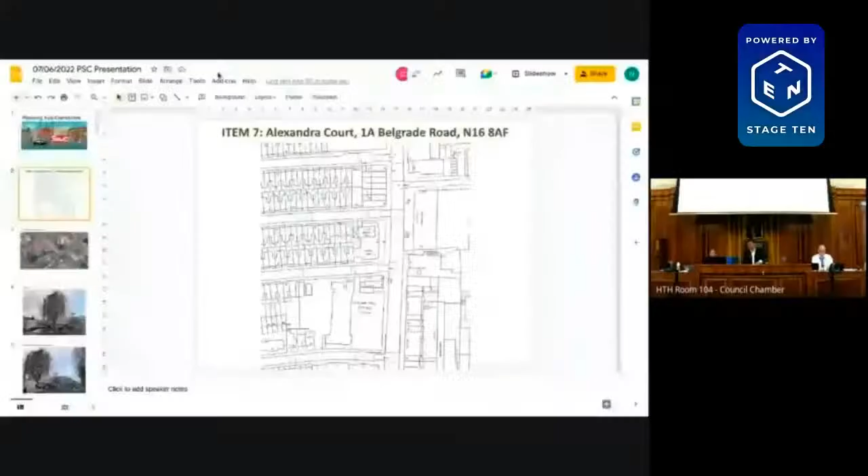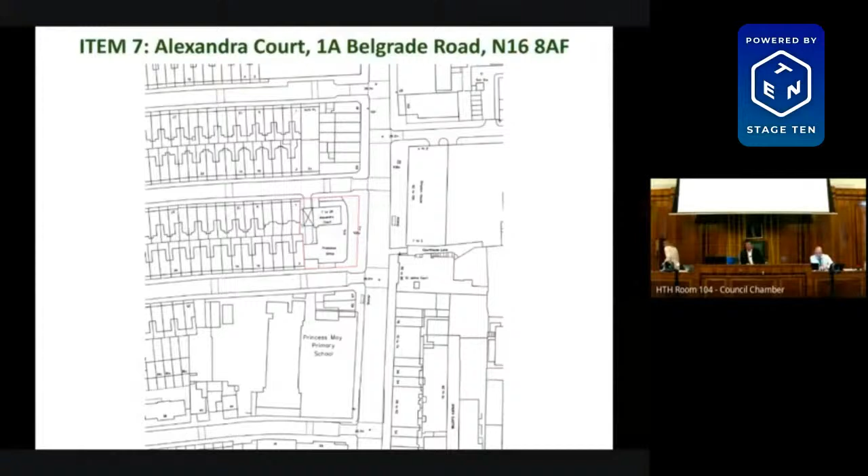In that case, we move on to the first substantive item, item number 7, Alexandra Court. And I believe we're being led by Nick on this one. That's correct. I will put the slideshow on. Can you see the slideshow now? Can you see that? Yes, we can see the slides. Excellent. Yeah, we're just going to dim the lights. One moment, please. Will you tell me when the lights are dim, because I don't have view of the hall now? Yeah, please go ahead, Nick.

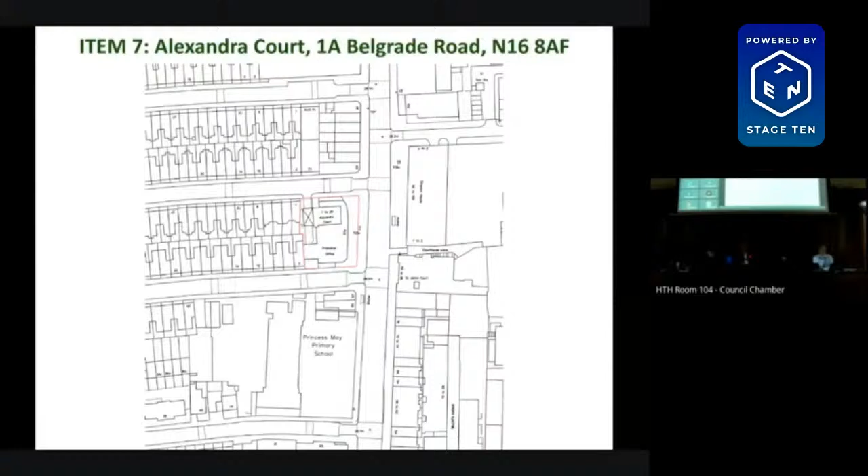Thank you. Application 2021-1807 is for the erection of a part 2, part 3, part 4-storey building facing Princess May Road and a 5-storey building facing Stoke Newington Road, following demolition of lower ground and ground floor office floor space in use Class E, to provide 15 self-contained residential units and a flexible use at ground floor level in Class E. There will also be external alterations to the existing Alexandra Court block to include remodelled front entrances. Before I begin, I'd like to draw attention to the addendum, which includes points in relation to M4(3) units and cycle parking, and corrects some typographical errors.

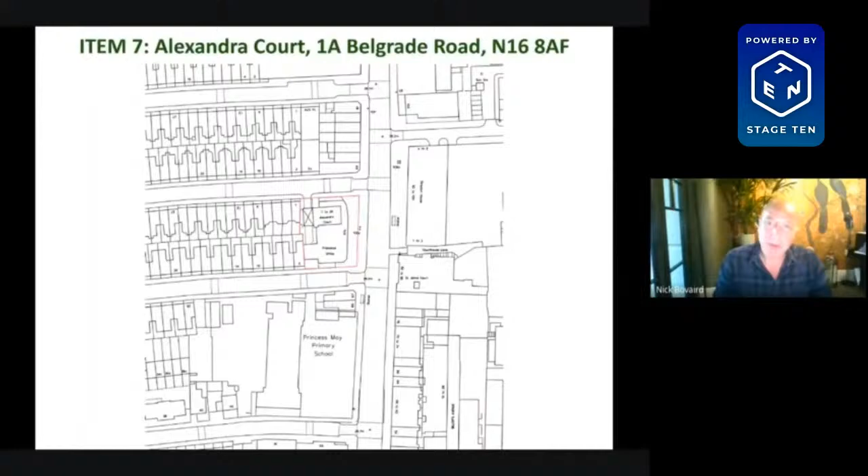Looking north, the application site is located on Stoke Newington Road between Belgrade Road and Princess May Road, and is currently occupied by a post-war 11-storey residential tower block and an L-shaped single-storey perimeter block. A largely unused basement floor covers the whole area of the site. To the east of the site is the boundary with Dalston Conservation Area, and it is located in the proximity of 3 locally listed buildings, which are here, here, and here. The existing building to be demolished had previously provided office floor space. This is the single storey element here.

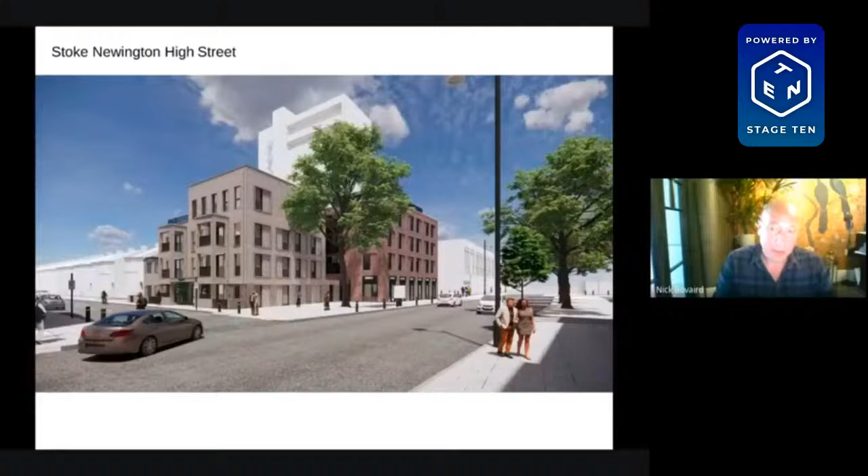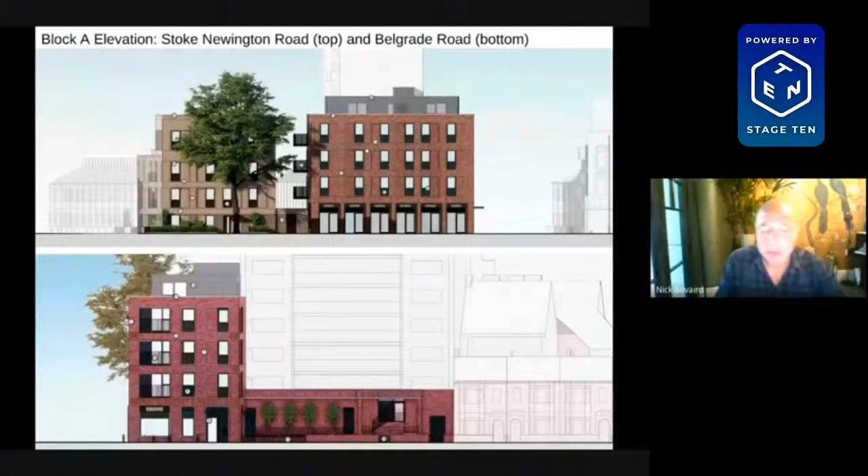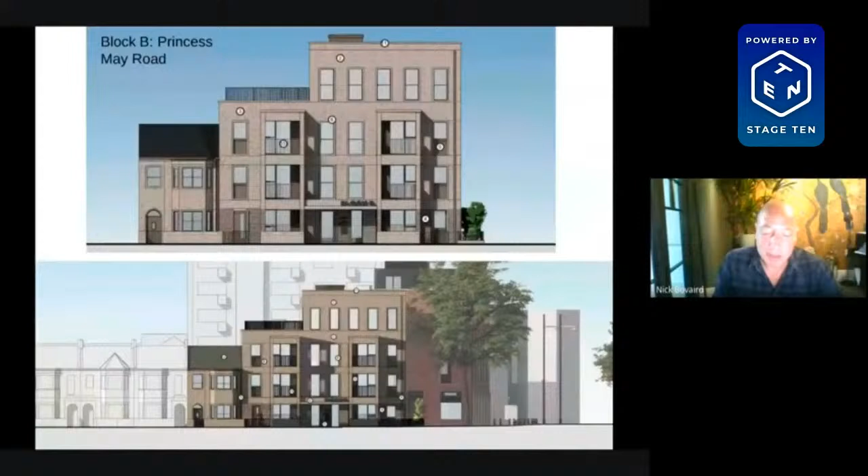Block A has a main 4-story massing in brick, along with a top-story setback floor in powder-coated aluminium. The ground floor level would be in a Class E commercial use with 7 residential units above. Block B steps up from the 2-story massing of the adjacent terrace to a maximum height of 4 stories. It has inset balconies that recall the Victorian terrace and is to be built in a light brick. The materials along with details of the design would be managed by the recommended conditions, and the design of the 2 blocks is considered to be a high-quality response to the sensitive location.

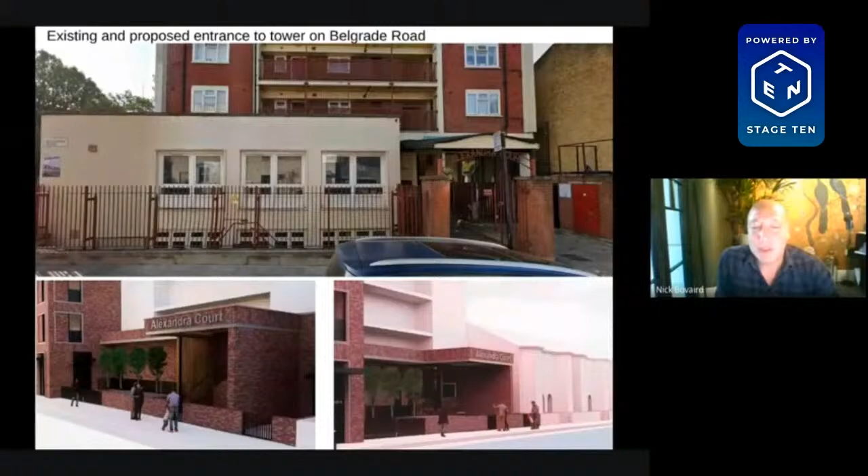In order to ensure that the design of the new development works well with the entrance to the tower, a reworked ground floor facing Belgrade Road is proposed in a matching brick to Block A, and this is considered to be a benefit of the scheme.

The site plan shows the commercial space at ground floor of Block A here. The proposal represents a net loss of former office floor space, but this is considered to be acceptable, given that the rest of the proposal provides 100% affordable housing. The existing floor space has been vacant in this use for a considerable period, and it is now within use class E, so it could be changed to any of the uses of use class E without planning permission.

This plan also shows how the demolition of the perimeter block allows provision of a courtyard between the 2 blocks that allows dual aspect and provides access to the internal cycle store here. This cycle store has a majority of 2-tier parking, but does provide 8 single-tier spaces, including 4 for larger cycles within its overall provision of 42 spaces. The overall number of spaces is 12 above the policy target for a development of this size, and the additional spaces would be made available to existing residents of the tower. The reasoning is understood and the proposed internal cycle parking is considered acceptable.

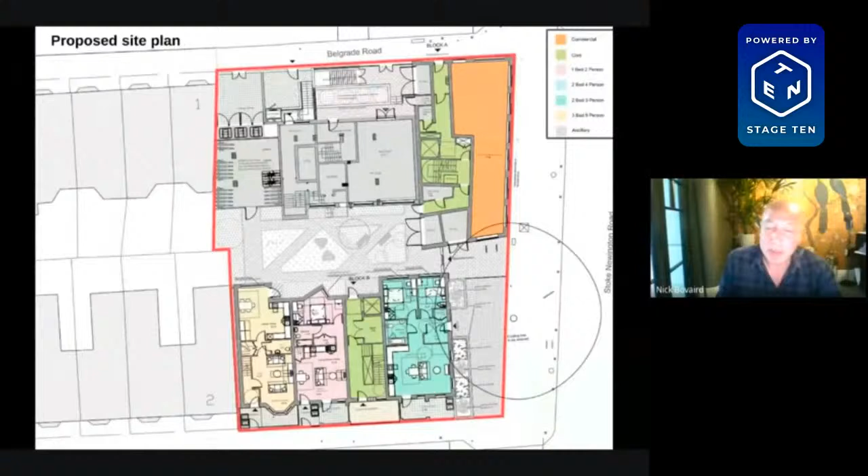A CPZ exclusion to restrict parking permits being issued is recommended for all residential users of the proposed site. 1 blue badge space will be placed on street prior to the occupation of the new buildings.

Overall, the quality of the proposed accommodation across both blocks is considered to be very good. All the units meet the required floor space standards. They're all dual aspect with good access to daylight and sunlight, and they all have access to private amenity space in the form of balconies or a roof terrace.

In terms of sustainability and biodiversity, as detailed in the officer's report, the scheme is also considered to be acceptable, with air source heat pumps, green roofs, swift and bat boxes, along with a carbon offset payment. A number of conditions are recommended to ensure that the scheme is carried out appropriately in these respects.

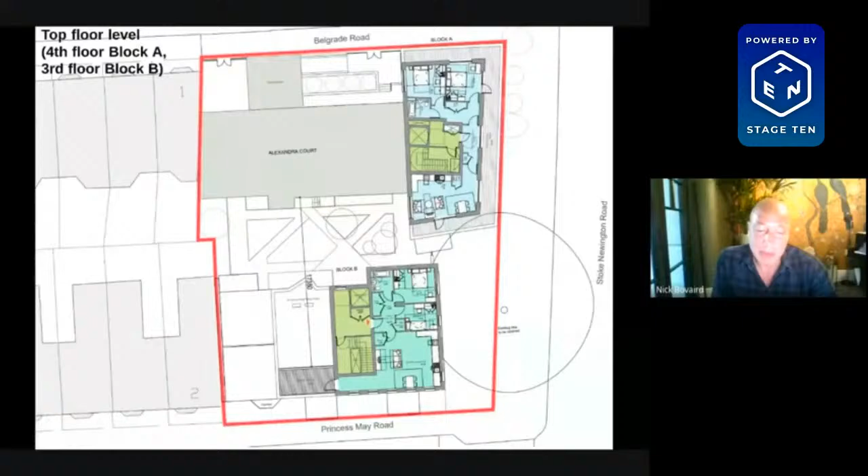The floor plans of Block B show the layout, which contains 8 units. Adjacent to the terrace is a 2-storey house of 3 bedrooms, shown here in yellow. The 3-storey element, shown in pink, contains 3 one-bedroom units accessed from the court. The 4-storey element, shown here in turquoise, contains 4 2-bedroom units.

Overall, the proposed housing mix is considered acceptable. It's strongly supported by the borough's housing team, who note that the proposal is for 100% affordable housing, provided as London affordable rent, which is considered directly equivalent to social rent in both the London Plan and Local Plan 2033.

The applicant is the Islington and Shoreditch Housing Association, who've designed the proposed housing mix to respond to their own recognised housing need. In addition to the 2 proposed 3-bedroom family units, smaller 1- and 2-bed units within this tenure are in demand as a result of the government's bedroom tax policies. And this additional supply of smaller units would give existing Hackney residents the opportunity to downsize, freeing up larger units for families currently living in overcrowded accommodation.

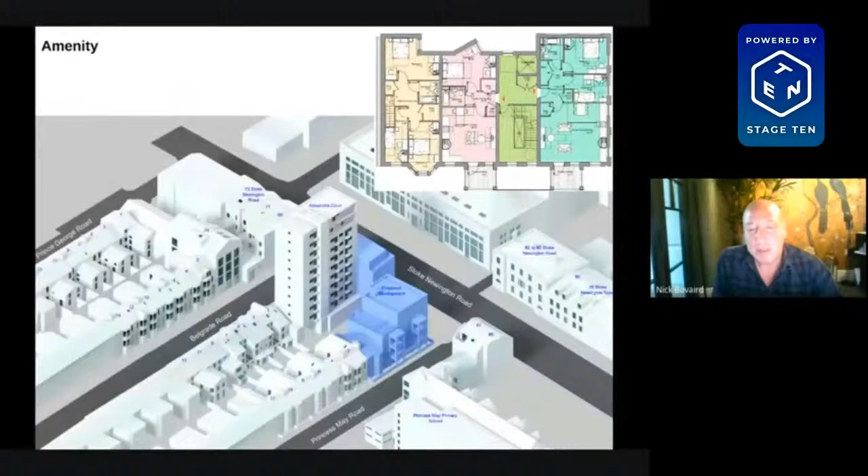As is laid out in the committee report, in amenity terms, the massing of the blocks is sufficiently set away from surrounding windows to ensure there would be no significant impacts on outlook, daylight, sunlight, or sense of enclosure. As is shown at the top right, the rear of Block B is designed so as to prevent overlooking, with the orientation of windows away from the existing windows of the tower.

The uppermost flat in Block B has the use of this roof terrace, which is sufficiently distant from the facing existing residential units of the tower that a privacy screen is considered unnecessary in respect of overlooking. For these reasons, the proposal is considered acceptable in terms of its amenity impact on existing residents.

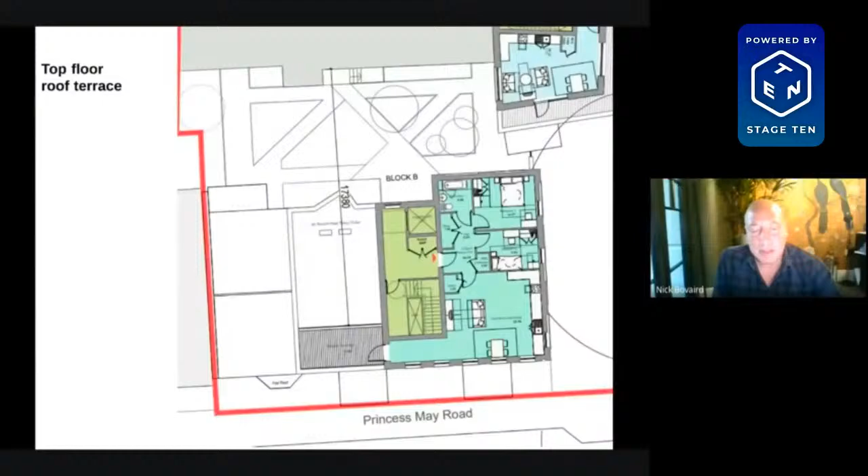It has been agreed with Transport for London and the borough's tree officer that these trees could only be removed if they were to be replaced by suitable replacement trees. In order to ensure that trees can be planted without conflicting with existing subsurface infrastructure, the applicants have dug a trial pit under licence from TfL. This process was successful, and the applicants have now proposed 5 replacement trees parallel to the existing location. The proposed trees are shown here within a tree pit and would be planted under the recommended 278 works.

The CAVAT value of the existing trees is calculated at £22,000, and this is required as a payment in the proposed legal agreement. 6 additional trees are proposed within the borough's own highways works figures of £59,000, and these would be planted on neighbouring streets near to the site. For these reasons, the proposal is considered acceptable in respect of its impact on neighbouring trees.

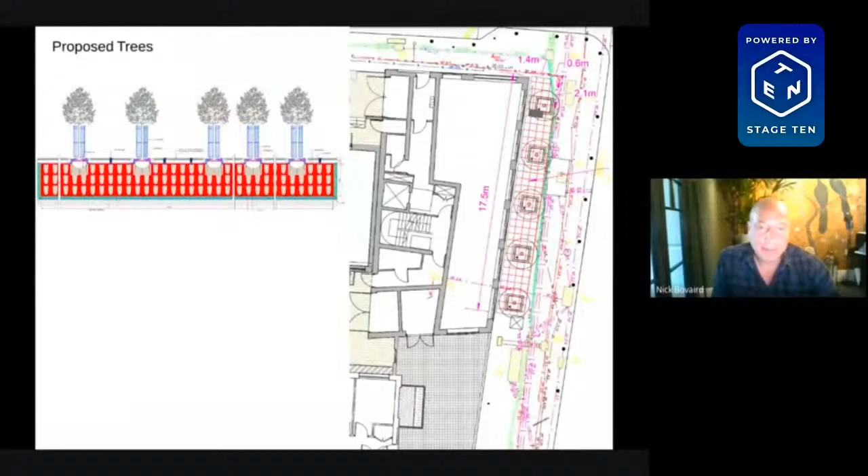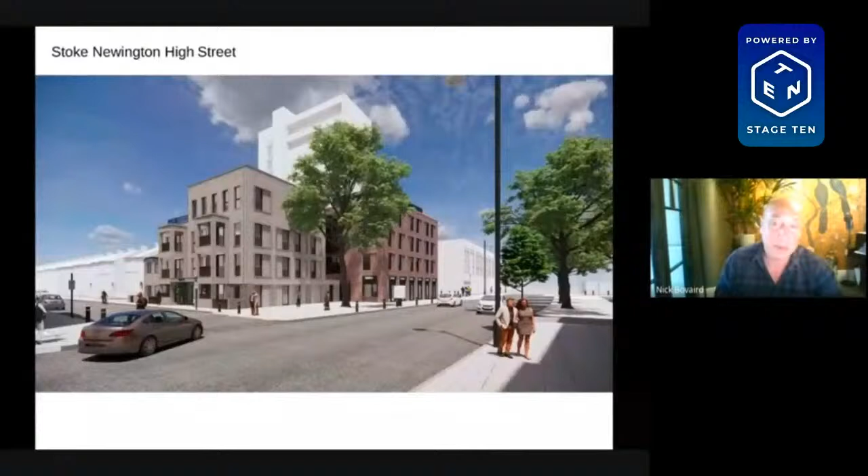And to conclude, the proposed application is considered to be policy compliant. It provides 15 units of affordable housing in a sustainable location and in a genuinely affordable tenure. The proposed design is considered to be of high quality and would rebuild the street frontage following the demolition of the unattractive existing perimeter block. The proposal would provide a good standard of accommodation and would be without significant impact on neighbouring amenity.

In addition to providing affordable housing and a ways into work financial contribution, a payment to entirely offset the carbon emissions of the development is also provided, along with highways works to improve surrounding streets. In these and in other respects, the scheme is considered acceptable and is recommended for approval.

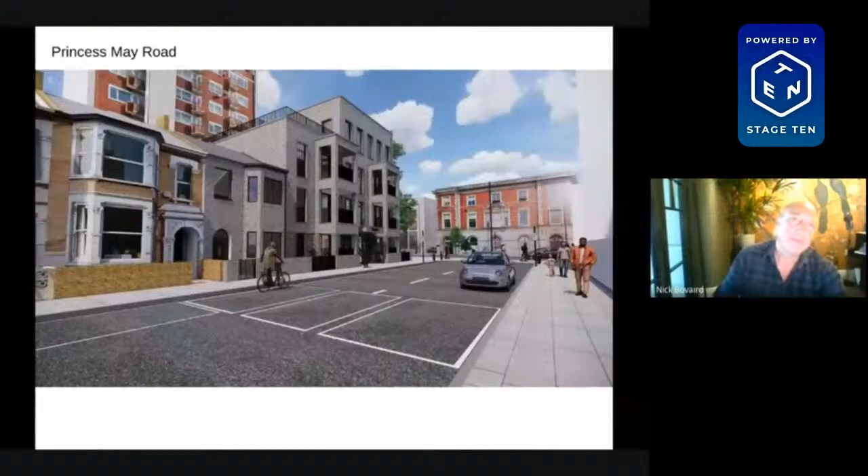Great, thank you very much, Nick. Can we get the lights? Is that right? Thank you.

Right, moving on to speakers in that case. I think we've got one objector, Lorien. Is that right? Nice to see you, Lorien. We're operating the traffic light system, so when it goes amber, you have a minute left, and when it goes red, you'll have 10 seconds left of your 5-minute allocation. Is that okay? That should be fine, thank you. Great, no worries. In your own time. Thank you.

Yes, I'm Lorien Davis. I live at 2 Princess May Road. You'll have seen a few pictures of my house. Number 2 is the only building in the road currently physically attached to the former probation office, which is now temporary accommodation. And this is scheduled for demolition for this project.

With my late husband, I was one of 7 local residents who made it to the September 2020 exhibition of proposals, held, strangely enough, a third of a mile away, despite there being a church hall at the bottom of Princess May Road. We made our concerns about the plans known at the time, and we were promised follow-ups and more information, none of which ever materialised.

Princess May Road is a designated school street. If this goes ahead, there will be huge disruption to available parking and deliveries. Site traffic will cause potential danger to children using the main entrance of Princess May Road School, which is opposite the new development. Or if site traffic enters from Stoke Newington Road, which is a red route and a major bus route, this will be disruptive and potentially dangerous.

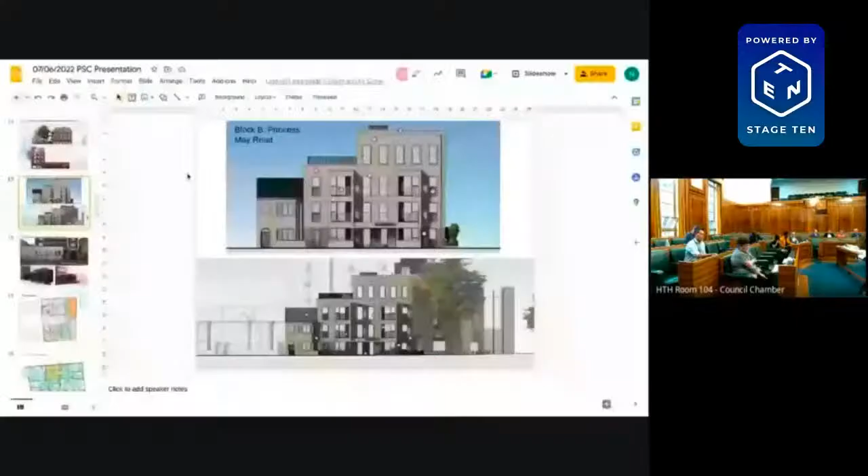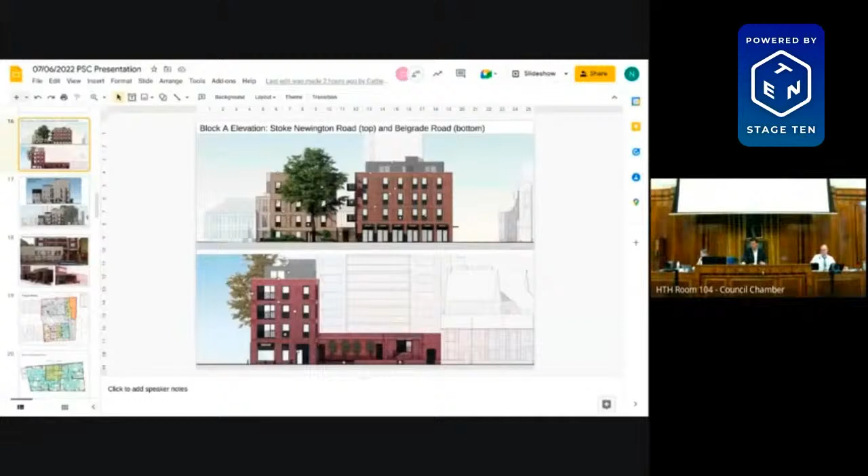So this is how they propose to look on the development. It's 8.1.32. The condition, I thought it was 33. Sorry, Councillor Boswell, can we just finish with Nick and then I'll come back? So the condition is 8.1.33. Can you see this now? Yeah, we can.

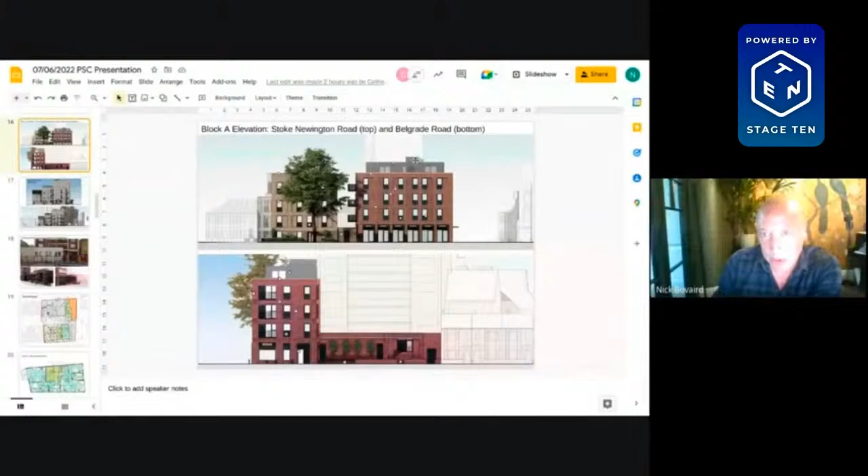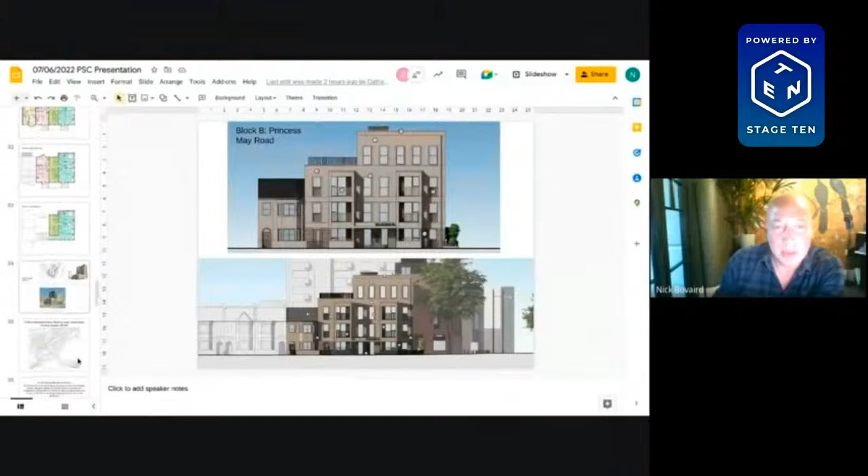Thank you, Nick. So we've got heat pumps on each building, and then do I have a roof plan? Sorry, can you speak up, Nick? Yes, sorry. You can see above the parapet line we've got a plant store there. That's what it looks like. I don't think I've got a roof plan in these drawings, apologies. But essentially there is space for heat pumps on one of the buildings, which would be 8 units, and one of the buildings, which would be 7 units. So you've got quite a lot of space up there, and there's also a green roof on one of the buildings that has the heat pumps.

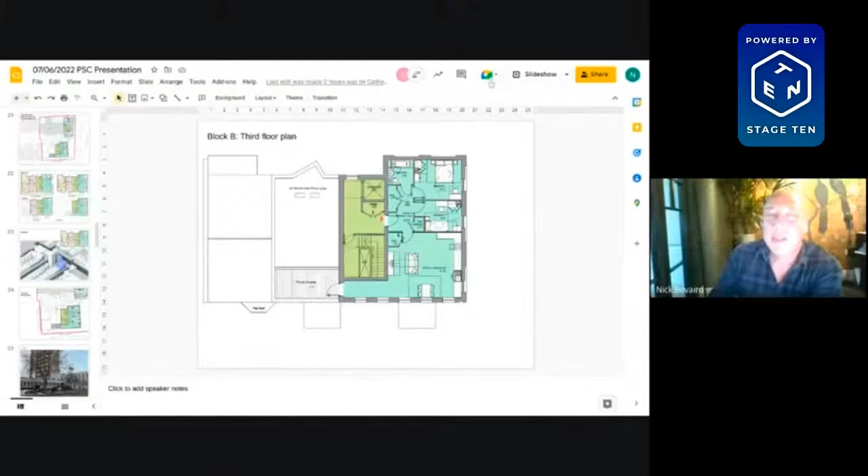Sorry, Nick. So you're saying that the heat pumps are on the roof, not on each of the individual units? Yes, exactly. They need to be external and they're on the roof, because they need to draw heat from the air. So you can't stick them internally or in an internal plant room in a basement. I think members might have been imagining, as I was at the beginning, one stuck onto the side of each of the individual units. Oh, I see what you mean. They may not be communal. They may be connected up to each individual unit. That's correct. Sorry, I didn't understand what you meant.

I've got another scheme at the moment, which is why it's a live issue for me, where another developer is saying that they're actually a lot more efficient in the building they're building if they're individual rather than communal, which is something we're getting to the bottom of. We do have that condition on this one that allows us to have a look at them at the next stage. It may be something we're interested in revisiting. Certainly it's a live issue on one of my other schemes.

It's that I just can't see it working to have 15 individual units of a flat being so far removed from, say, the ground floor flat, first floor flat. They need to be relatively close. I mean, just from my limited knowledge of how heat pumps work, what I'm concerned about is developers and applicants claiming that they're putting a certain system in when actually it's not practically possible. But I'm not an expert.

I will acknowledge that, but just from my limited knowledge, I would query that you could have 15 individual condensers that would work for 15 properties spread throughout the building. But anyway, I'll leave that there. That's all right. Chair. Nick, do you want to just answer that one about what's the expectation, what's the policy around this? Certainly, I don't mind answering it.

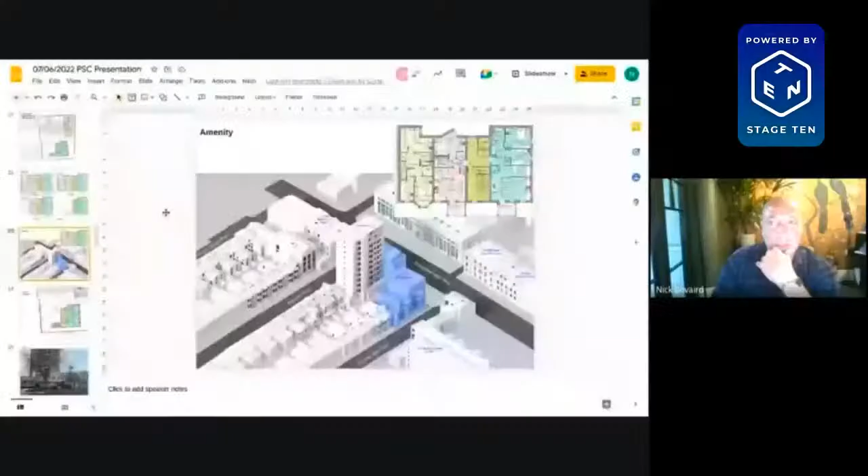So what you see here is Princess May Road and the neighbouring part of the development. Now, it might also be helpful to see the other side of that, but effectively it doesn't go any further back than number 2 Princess May Road. So there's not really any bit of it that could overshadow it. And that's borne out by the daylight sunlight report.

So if you look at the daylight sunlight report in detail, it tells you what the VSC impacts are, for example, for the daylight of each individual window. So it's not the most interesting read, but it does break down all of the detail that you need. So if you ever have a question like this in future, you can always have a look at that in advance.

Now, the biggest impacts are to these windows here. And as I said earlier, those impacts are not so significant as to warrant refusal of the application. But you don't necessarily need me to go into all of that detail in my report, because it's already in a report that's been read by me and summarised for you effectively.

The other part of the question, I think, was the statement that might seem a bit bold on first hearing, that it's always possible to build next to something without damaging that building. And that is a hypothetical situation in which everybody knows what they're doing, in which everybody goes through building control and thinks about the work that they need to do. It is possible to build without damaging, for example, here, number 2 Princess May Road.

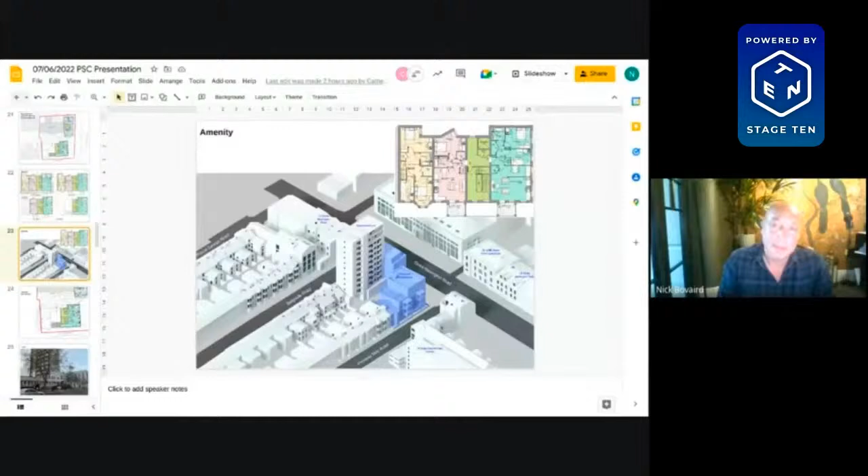Devil is in the detail, and that detail is considered by the building control team at the next stage. And yeah, it will be possible. Then it's up to the applicants to make sure that they make the possible happen. Great, thank you, Nick. John, Councillor Nobles, to answer your questions.

Great, thank you. I'll go to Councillor Levy before Councillor Joseph first. Thank you. Thank you, Chair. Just a quick one. Should the committee approve this application, I wonder whether we can put an informative in that the disabled bay should be sited within 50 meters of the block entrances. Otherwise, it defeats the purpose of having the disabled bay in the first place. Put an informative in.

It's an on-street bay, so we have control over that, and I've committed in the addendum to it being within 50 meters because I realised that was something that I'd left out of the original report, but it's something that we do as standard, but it's also worth saying in our report, so I put it in the addendum to make sure that it's there. Okay, Councillor Levy, great, thank you. Councillor Joseph. Thank you, Chair.

So just a few questions about the designs of the flats themselves. I'm not sure if Nick or the applicant would like to answer, but they're all open plan. And in terms of family living, that can be a bit difficult with things like noise from the kitchen, things like washing machines, heat from cookers and so on. I just wondered why you decided to make them all open plan rather than having a separate kitchen area. That's my first one. Nick, can I bring you in on that one?

I think this is a design choice that's made in many places, and it's really up to the applicants how they set these floor plans out. If you look at the house, for example, it's not open plan. Here it is open plan. It's a design choice, I suppose, based on things like where the windows are, the constraints of the particular rooms. You've got separate rooms for people to disappear into, but it's not something that we would necessarily start making applicants do one or the other. So there's no policy around it particularly that we would ask for.

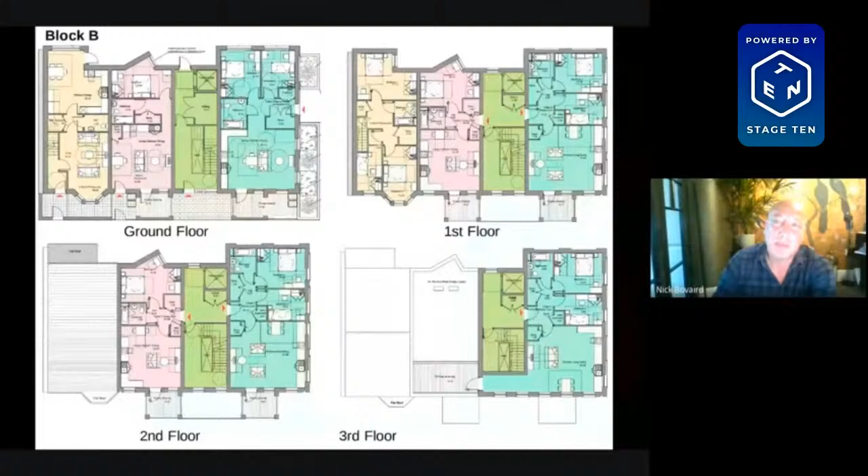There are policies about quality of accommodation, but this isn't really a question of whether something has a good or bad standard of accommodation. It's really a matter of choice for the people who go into the places and also for the designers. And we don't think that there is any reason for us to refuse one or approve another. Okay, thank you. Applicants, anything to add to that? Or no? Okay, thank you.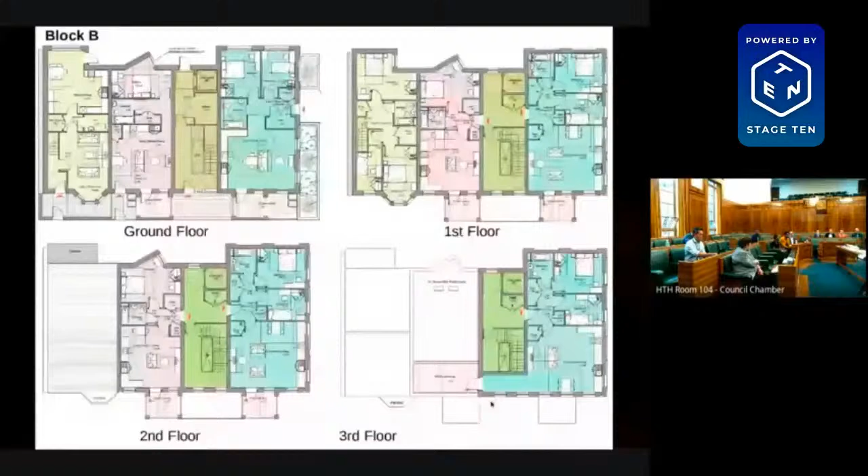On block A, the top floor flat that's inset has access to its own terrace, but the roof of that flat is for maintenance purposes and plant. So it would only be access for maintenance only. Okay, you happy? That's okay.

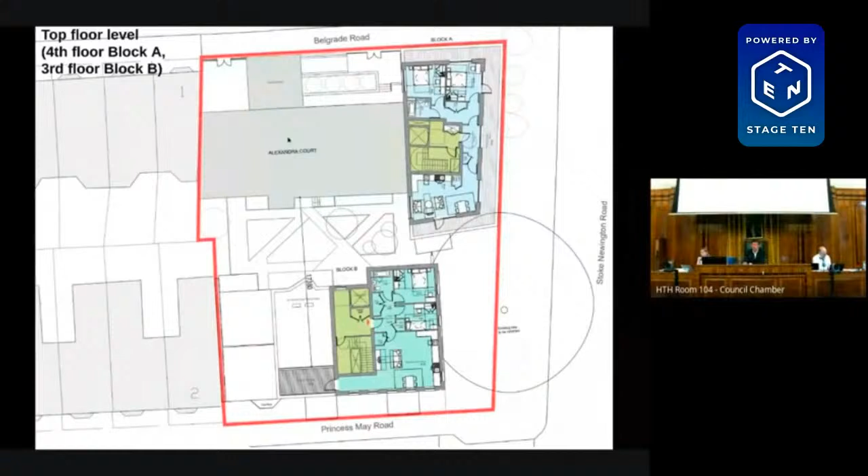Great. Just questions from me on cycling, if you wouldn't mind. You've got cycling provision in there, which is good to see. Can I just check around security of the cycling provision? It's a special interest of mine in terms of making sure they're as secure as possible so that people don't feel they have to use their inside space or their balconies or whatever for cycling. So will there be CCTV? Will there be good security around the room?

So the cycle store has been designed following Secured by Design guidance. It's accessed from the internal courtyard. So there's a first stage of access before you get into the cycle store. So there's 2 stages of access, and it's secured by, I imagine, a fob system. So only residents can use it. Okay, thank you. And then you have quite a lot of 2-tier cycling in there, which again, we don't like all that much, but I know there's some storage for larger bikes and Sheffield stands.

Joe, I think, is it Joe? Yeah, Joe, any comments on the cycling as we've discussed it previously? No, I mean, just to say that this was certainly something that Nick and I worked on fairly extensively to really try and get as much single-tiered cycle parking into the application as possible. So obviously we've increased the visitor cycle parking and that element.

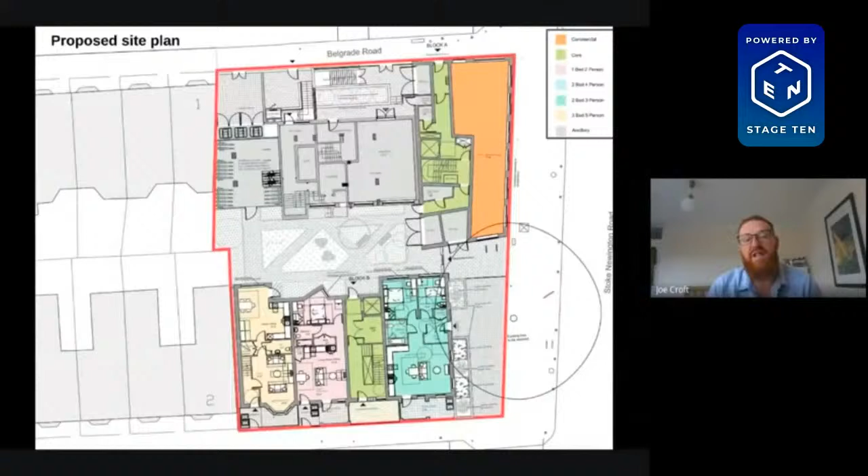It's difficult because clearly, as you say, we ideally would not want this percentage of two-tier cycle parking. But equally, the real merit, I think, is undeniable, that it brings existing residents who don't have any places to park their bikes 13 dedicated spaces. So in balancing those positive aspirations, we do support the provision. And as Nick said, the scheme is way above policy in the quantum of cycle parking that's provided. So yeah, we do see it as justified. Okay, thank you very much.

Right, any final questions? I feel like we've given it a good run through. No? Okay, great, thank you very much. In that case, we will move to the vote. So the proposal is that planning permission be granted, subject to referral to the Greater London Authority and the conditions set out in the report. All those who are in favour of that, please raise your hands. Great, that is unanimous. I won't ask for abstentions or against in that case. So thank you very much. Thank you to everyone who spoke on it. And thank you for attending.

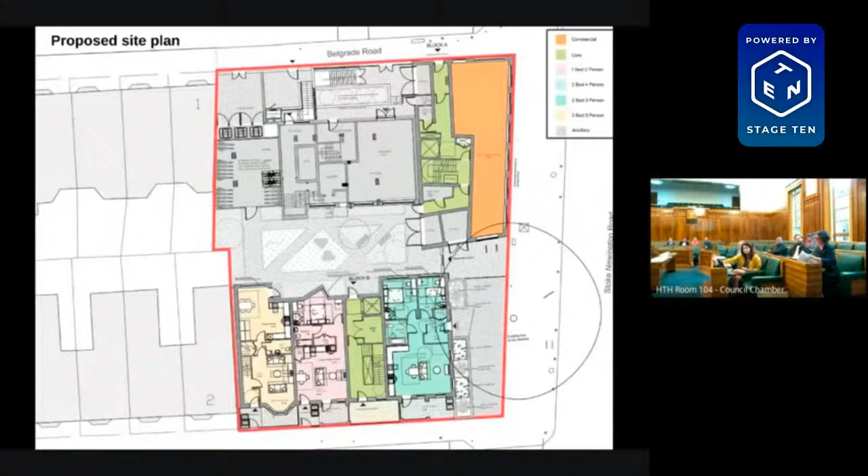Great. Gareth, do we need to change over people? Yeah. So thank you everybody who's joined us for item 7. So that item's now finished. In the room we don't have any persons speaking in objection to item 8. So we just have representatives from the applicants who will be answering questions. So if the persons for item 7 could now leave the chamber, then the applicants for item 8 can sit where you're currently sat. Thank you once again to everybody who attended for Alexandra Court. Thank you.

Gareth, can we just note as well that Councillor Young has left? Oh yes, just for the record, Councillor Young did mention it under declaration of interest. Councillor Young has declared her interest and has now left the meeting for this item. Great, everyone in place. Thank you. In that case, item 8 will be Woodberry Down phase 3. I think we're being led by Catherine. Good evening, members. I'm just going to get my presentation up. I won't be a second.

Okay, so hopefully everyone can see this. We can, thank you. Right.

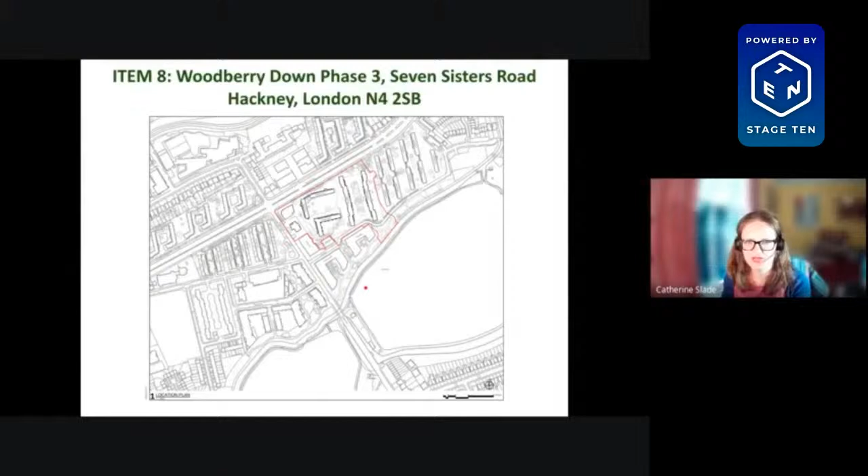This application before members is a submission to discharge in part a condition relating to materials and detailing of an approved scheme. Members will note that there is an addendum report which amends the recommendation through the removal of 2 of the approved documents which are no longer relevant to the application. Apologies.

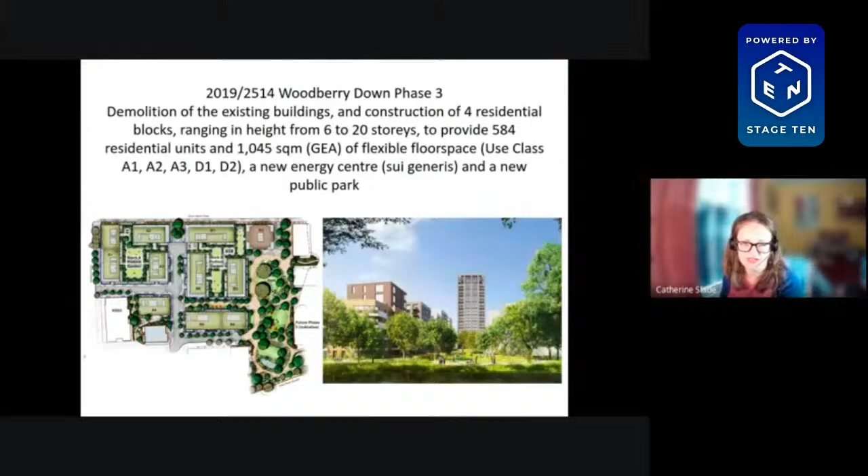For the benefit of new members of the Planning Subcommittee, the consent grants planning permission for a mixed-use residential development delivering 584 units, of which 117 are social rented and 126 to be shared ownership, together with a public park and energy centre. It represents a single phase of the council's largest estate regeneration scheme. Since 2020, various conditions have been discharged and the demolition of existing buildings has been completed, with construction underway.

At the time of the determination of the previous application, or the main application, members of the Planning Subcommittee resolved that Condition 18 should be reported to Planning Subcommittee, and this is the text, which I'm not going to go through. Details have been submitted in relation to all matters, with the exception of screening to rooftop plant, which is the one identified in red here, which will need to be submitted separately at a later date.

I'm not going to go through all of the details that have been submitted, but I am going to go through some to illustrate what's been submitted in terms of the headline matters. But I can assure members that consultation with the relevant teams within the council has been undertaken and the details assessed as being acceptable.

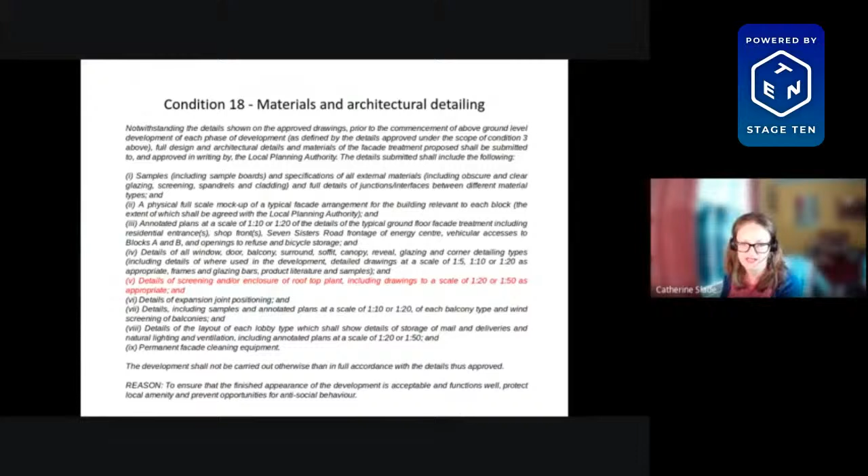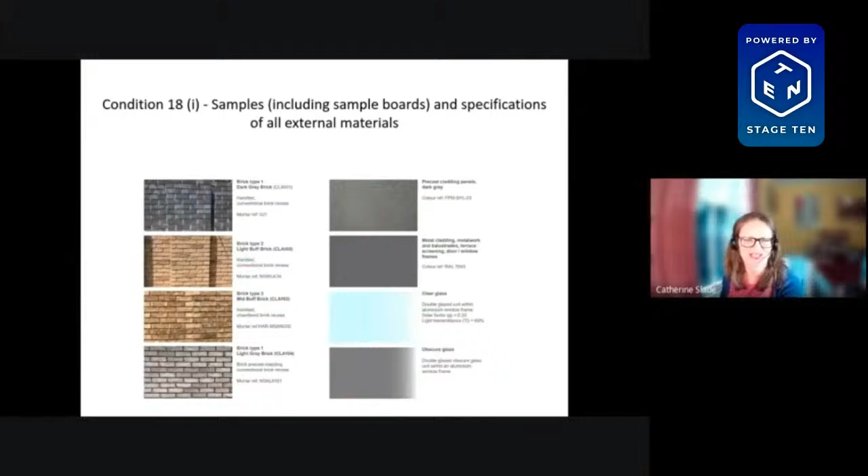So moving on to the materials, there are 4 main brick types with complementary mortar colours: a dark grey, a light buff and a mid buff, which will be distributed across the lower rise buildings, and a light grey, which will be used on the tower. There is also some metal cladding, which will be in traffic grey. The brick types and mortars have been assessed and were chosen in conjunction with officers.

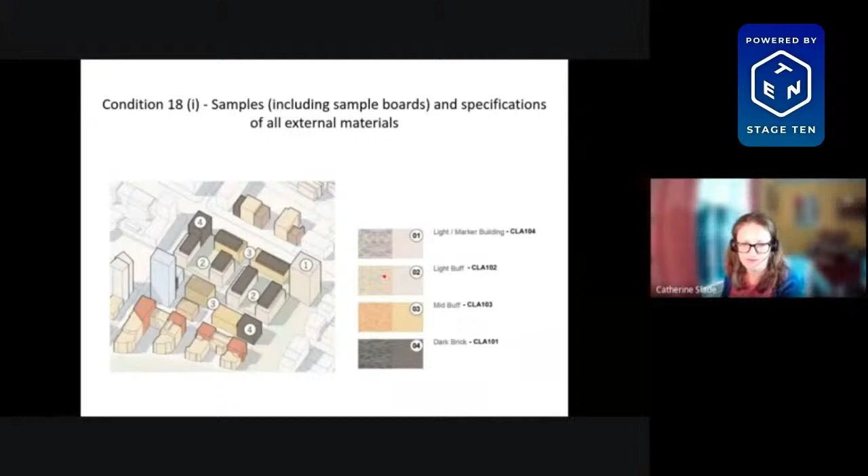This slide shows the distribution of the brick types across the development. For members' information, the materiality of the development is predominantly brick, with metal cladding restricted to relatively small detailing elements. This photo shows the sample panels, which have been constructed at the site compound entrance, and I hope that members have had an opportunity to visit them. They are visible from this highway.

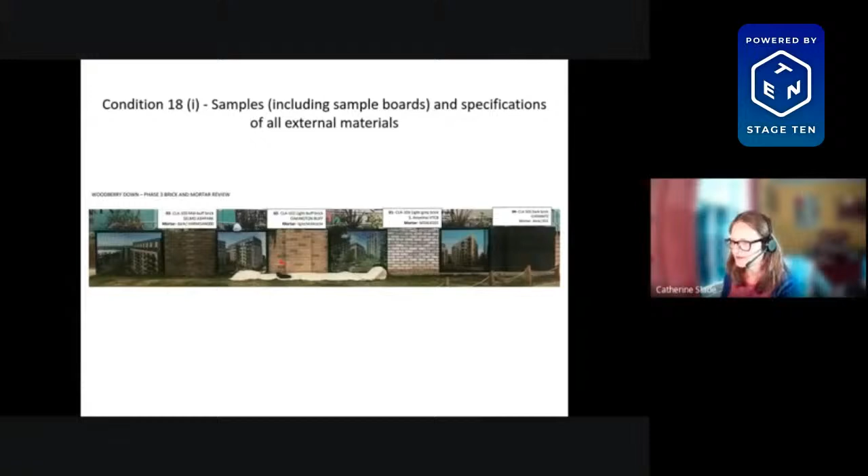Brickwork will be hand set on all buildings with the exception of the tower above ground floor level, which will be installed as precast panels. And I understand that the architect and the agent are present who can answer questions about the detail of the construction if necessary. These photographs show the facade mock-up, which was constructed on site. It illustrates the depth of the reveals and the relationship between facades and the window fittings.

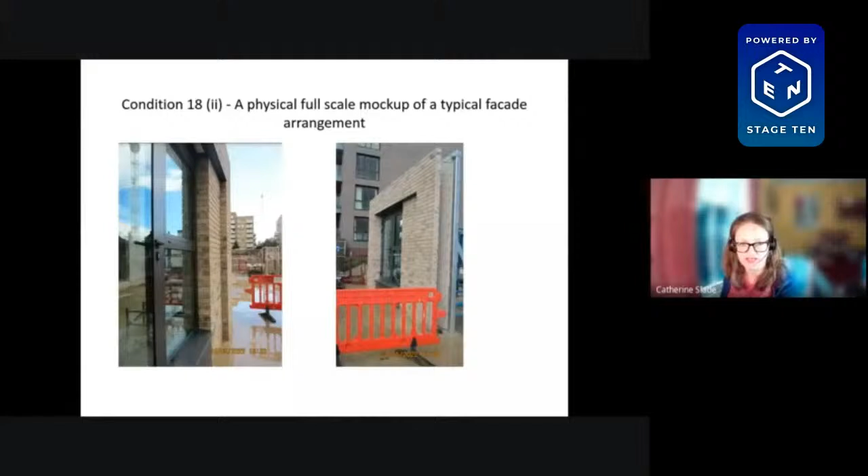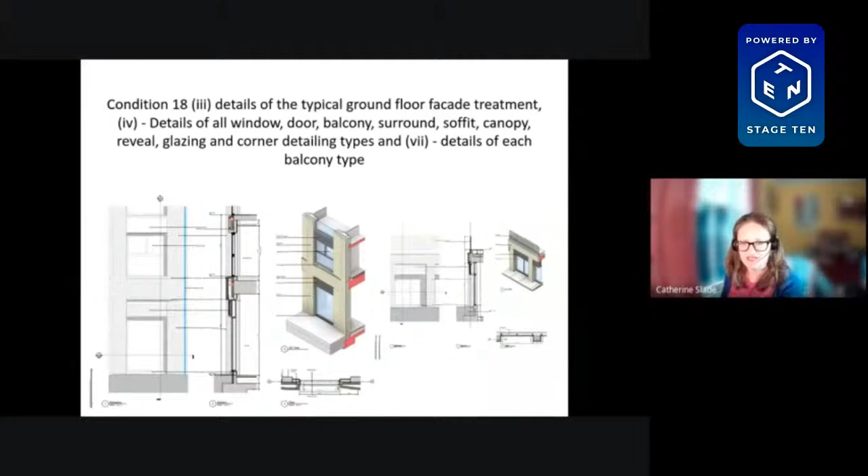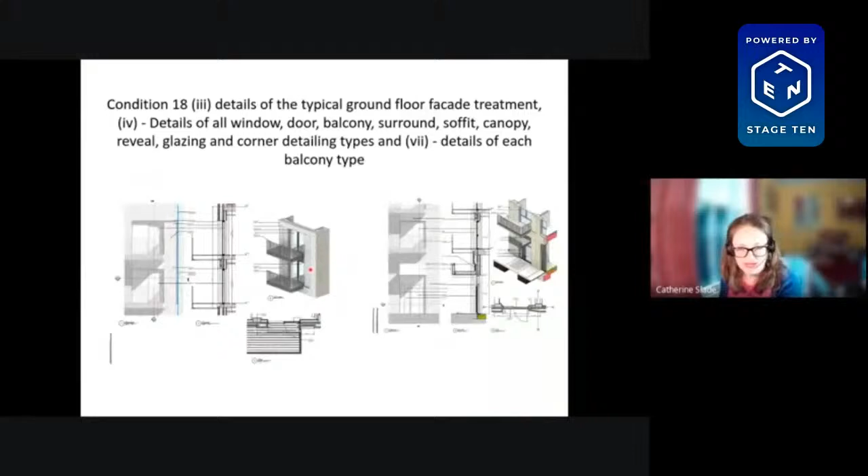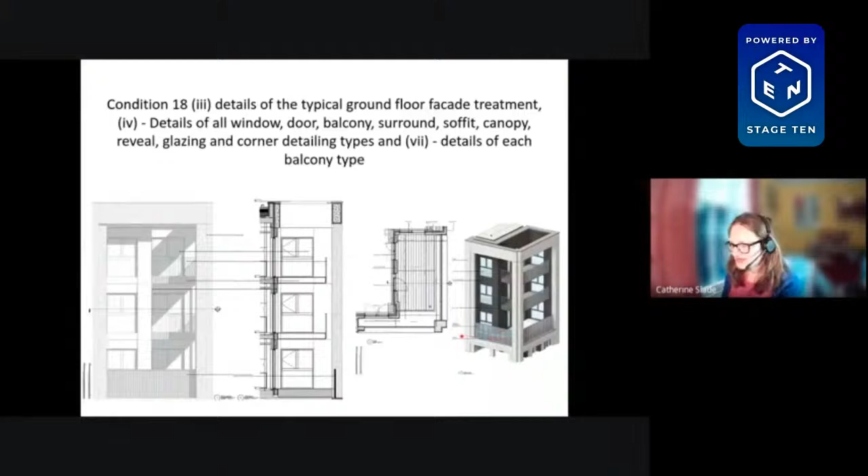These examples relate to the detailing of the crown of the tower and show the balconies and corner detailing to this part of the building. Now, I appreciate this does come across as being somewhat abstract. So this is a street scene elevation showing what the frontage to the Seven Sisters Road will look like, which will be one of the principal elevations.

You can see here there's the marker building at the junction of Woodberry Grove and Seven Sisters Road, which is faced with the dark grey bricks. The central buildings are faced with mid-buff with darker grey bricks at shoulder level, and the tower is predominantly faced with the lighter brick, with the ground floor having a similar dark grey to key in with details of the other buildings.

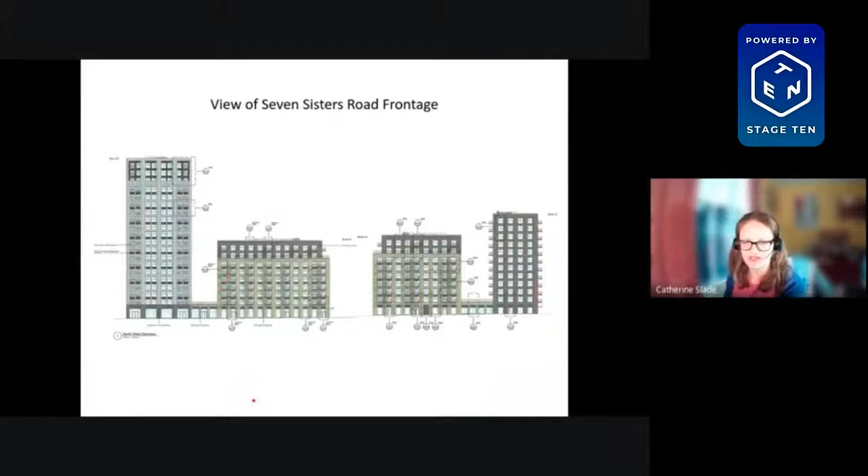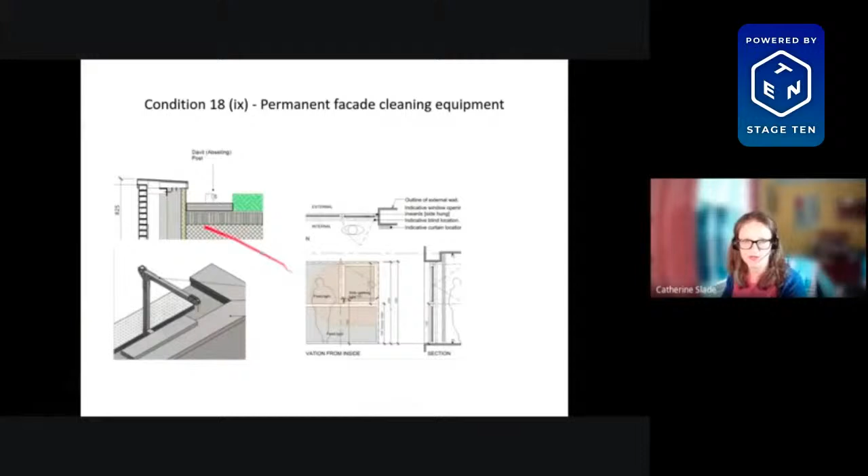In summary, the details submitted have been assessed and are considered acceptable, and there are officers from the Council's CUDS team present to comment if you want further details about the design merits. And as I said earlier, the architect is also present to answer questions. Great, thank you. So we have a couple of people here to answer questions, but I thought this is probably now the point to go and have a look at the bricks, see how you feel about them.

And it's also at this point in the meeting that I just wanted to mention, specifically more for the officers than anybody who's watching on YouTube or in the future, that the members are about to go from their seats to the centre of the chamber just to inspect the materials. I'm conscious that won't appear on camera, or just slightly on camera, so I thought I'd just mention that now.